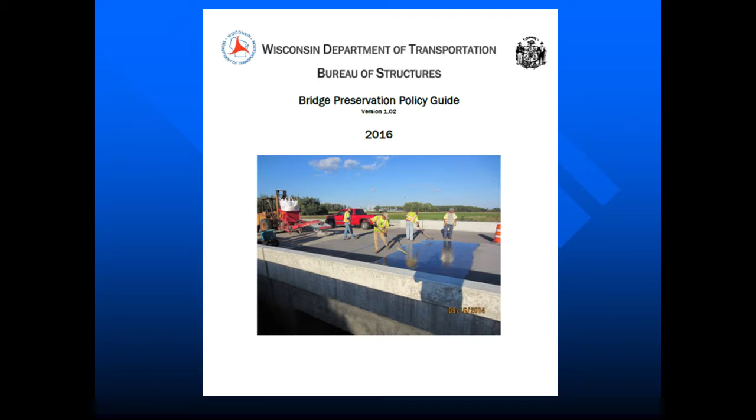But we built a preservation policy, and we consulted national sources, research related, as well as our own Wisconsin bridge maintenance engineers. And here's a few of them that participated in that. A couple of these guys, I believe Dave Bonzak and Tom Hardinger, are here at the conference. And I would really recommend talking with them, because what was important was not just a national or theoretical perspective, but actual practitioner input on this. So there's a lot of elements that you've got to weigh into this to get a policy.

The policy does have goals. We wanted 95% of our bridges in good and fair condition, 95% of the decks in good and fair, and various goals between 90 and 95% of the steel surfaces, expansion joints, bearings in condition state 2 or better. So we're mixing and matching here between NBI and element level performance goals. But as we made that transition from NBI to the element level, that's just where we found ourselves in time.

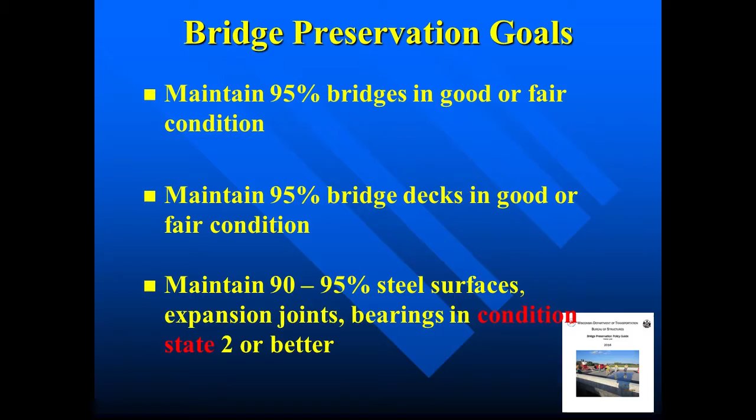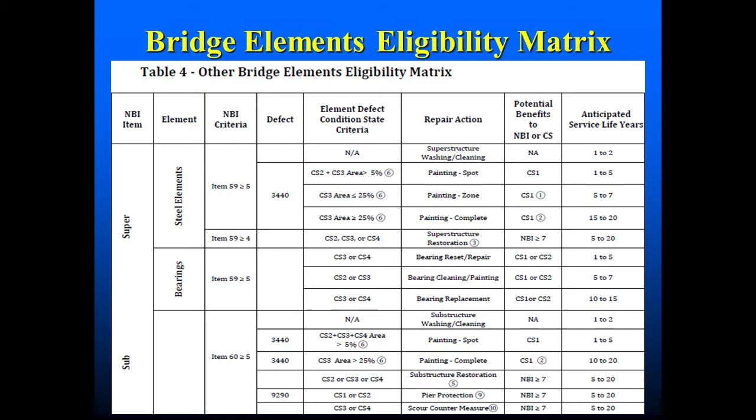Within our policy, we've got an eligibility matrix, and it has cyclical and condition-based activities in there that are indicated by both NBI and condition state, for decks, joints, railings. And we've got criteria in there. It relates to the defects. It has the repair actions in there, the potential benefit, as well as the service life extension. So these are just parts of the tables. They're actually much broader, and really look at the bridge overall in various aspects. But you can see some of those work rules here, and these are very important to what we're building towards in the future.

So part of this is not just to have a policy on what we want to do and what our goals are and what might be the criteria to trigger these works, but also to have an ability to do the work, to fund the work. And part of that stemmed from our Federal Highway Preventative Maintenance Agreement. So in May of 2016, we actually updated and signed a new agreement with Federal Highways. And what was important in our new agreement was it opened the door for some additional work types that we couldn't do historically, because we didn't have a completely functional bridge asset management system in place.

This agreement also had more work types in there, and it discussed the systematic criteria, tools, and process for implementing preventative maintenance and preservation type work. So we really got that incorporated in there. Really with these agreements that our state as well as many of yours have with Federal Highways, the real issue at hand is where's the line between routine maintenance and preventative maintenance and preservation. And the preservation end of it gives us a little bit of room for discussion. And to us, we wanted the door open as much as possible to have options to fund the work that really did maximize the life cycle benefit of the investment in those structures.

These candidates can include replacing the structure entirely, and it relies on the historic bridge inspection information. It also has deterioration, so we can look into the future. And that gets a little bit complex in that we've got NBI and element level information to consider now. So we pull data from our highway structure information system. That's the system that interacts with our inspectors, and they populate that with the regular inspections. The system will identify primary and incidental work types. So that was those charts that we showed earlier.

It will calculate the cost of those select work items, and it will calculate a condition assessment index of the bridge prior to and after the work. So you can see the benefit or the value in that investment. And it's really based off of a number of rules.

So given the inspection data, whether it is NBI-related information or element-level information, it will, on a regular basis, multiple times a year, originally I think we were thinking about doing this quarterly or every 4 months, but at least twice a year, we go through and run the routine, and it will run through and identify current needs based off of these work rules, and everything from bridge replacement down to overlays and other items in there.

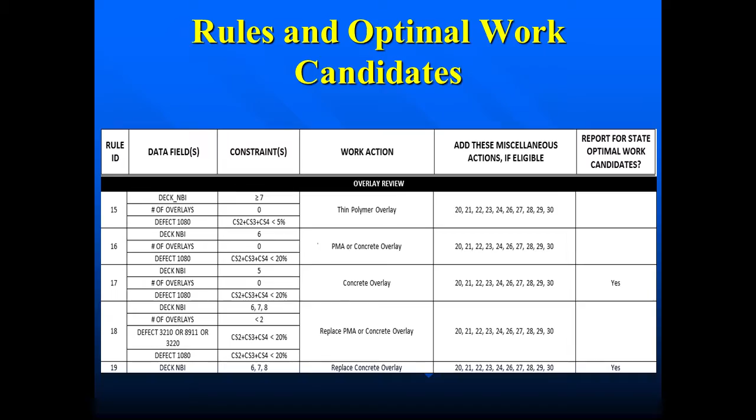So we can certainly identify current needs. The real trick is looking into the future and identifying future needs. So we do have deterioration of NBI values and element values. We also do an analysis of work types already in the program, and we do have the ability to calculate a prioritization index, or something that identifies criticality of the work. This is one part of it that we're still working on.

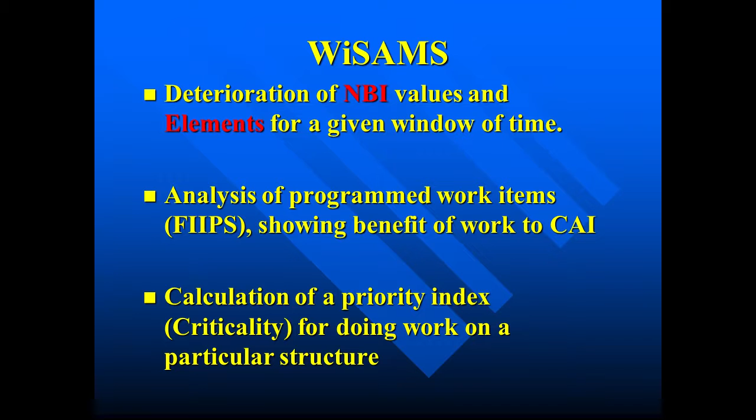We do have a routine that will do it now, but this is still up to some deliberation and adjustment, because that, again, is potentially where things become a little bit more political, is criticality of one project compared to another. But our programming people in our investment area, as well as our regional people who are actually identifying and programming these projects, it's clear as a bell that they need help with prioritization of the projects. So whether it's our current routine or future routines or whatever you're working on, that's going to be a very important element, because they need the help and they want the help as far as prioritization.

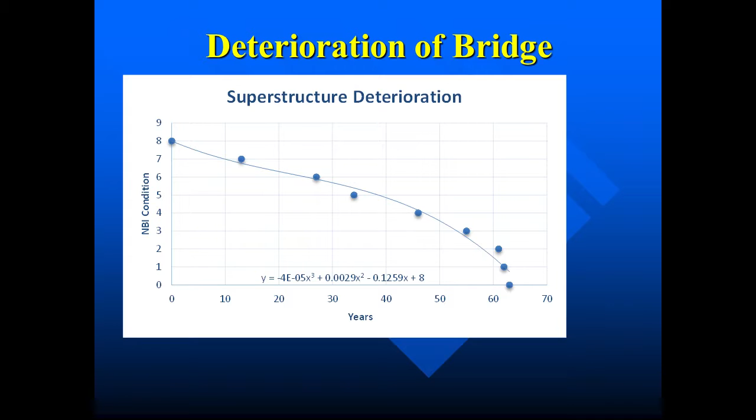So we do deterioration, and this is deterioration of some of the NBI for the superstructure, deck, and substructure. And I believe we did our own regression on these for the NBI. We've borrowed from the BrM developers some of the element level work that they've done, and we look forward to future releases of BrM and information that will help there.

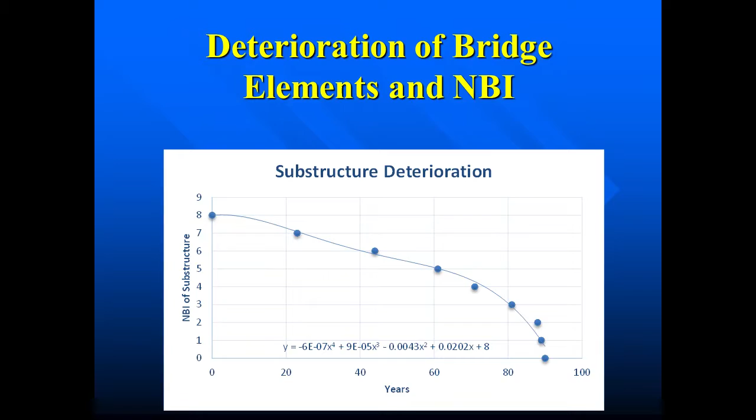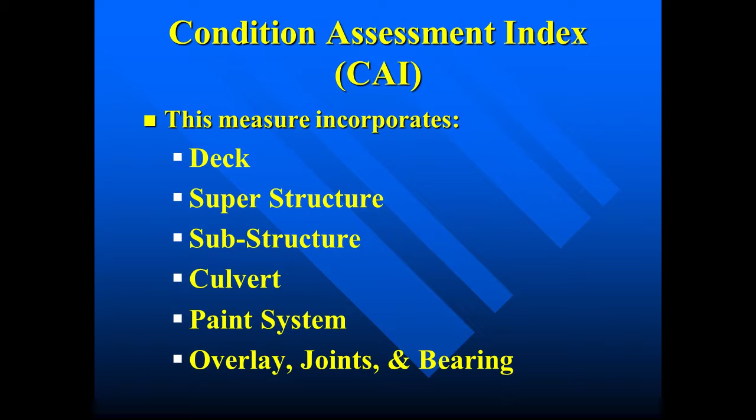Our condition assessment index incorporates the deck, superstructure, sub, culvert, paint system, overlay, joints, and bearings in there. There might be something else that I'm missing, but it's a pretty good measure of the condition. It's almost a health index of the structure.

So we supply this information, current needs and future projections. We supply that information to our investment management, our Central Bureau of Transportation and Investment Management. But we also supply information to the regions. So we'll give them more granular information.

So we're not asking our central investment people to program bearing replacements and things of that nature as part of our 6-year program. But that type of information can come down to our region people, and they can look at what the volume of some of these lesser works are and potentially combine them into economical themed projects.

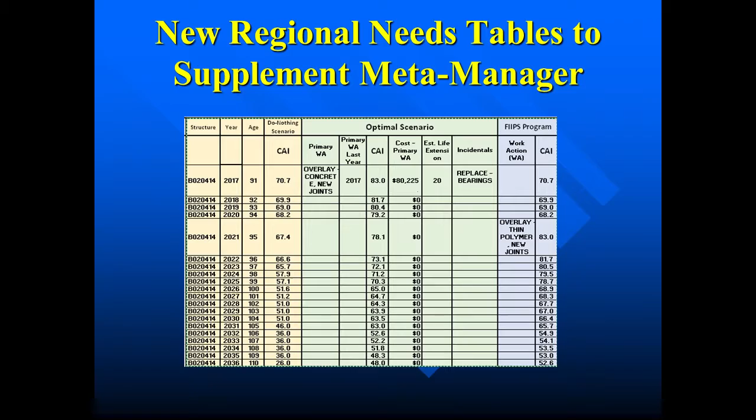So this is an earlier version of our WiSAMS table, but I chose it because I think it's a little bit clearer to see what's kind of going on here. So for a given structure, you can see the same structure going down here, and the years going down, as well as the age. And this is a particularly old structure. Our average age of our state system bridge is about 33 years, and our local are about 38 years. So this is kind of an outlier as far as age, but it'll do for demonstration.

So we have a current condition assessment index, and you can see that dropping in time as we deteriorate, whether it is NBI or element level information about that structure. Now you can also see, based off of the criteria and those rules set up, that we identified in a particular year that it triggered one of those rules. And for this one, it was an overlay and expansion joints.

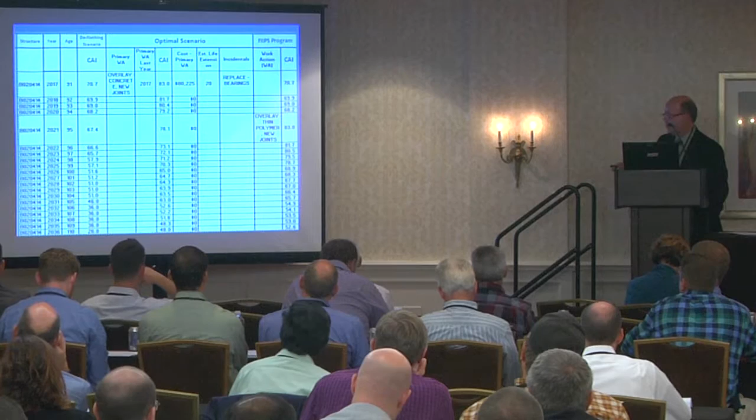So it indicates what year is the optimal or best year to do that work, and at some point that gets retired. The window's closed on that, and it's no longer a viable option. It shows the benefit to that condition assessment index. You can see it went up from 70 up to about 83. It will also give you an estimate of the cost of that work in that given year. It's at current dollars, I believe.

It'll give you the estimated life extension of doing that work to the structure, but it also is indicating the incidental or secondary items along that. Those are the items that wouldn't trigger a project, but if it's being selected as a project, very good information to know at the planning end, extremely good information to know at the scoping side. So yep, again, the optimal work, the condition assessment, benefit of the action.

What it also does is it looks into the commitments that have already been made in our financial programming system. We call it FIIPS. That's where once a project is identified and a commitment made to program it in a particular year, it will be sitting out there. And the WiSAMS will search for it, and it will note that that project does exist in a particular year. Here it's out in 2021. We thought this project should happen in 2017.

Well, WiSAMS is doing this routine based off of unconstrained needs, first of all. And secondly, when the decision makers at the regional level are programming projects, they've got a lot of other issues to consider in making a decision about programming a project, whether it is the availability of funds, whether it is other projects going on in the vicinity or parallel to this, or a whole host of other things. So we don't really expect each one of these recommendations to be adopted specifically in the year.

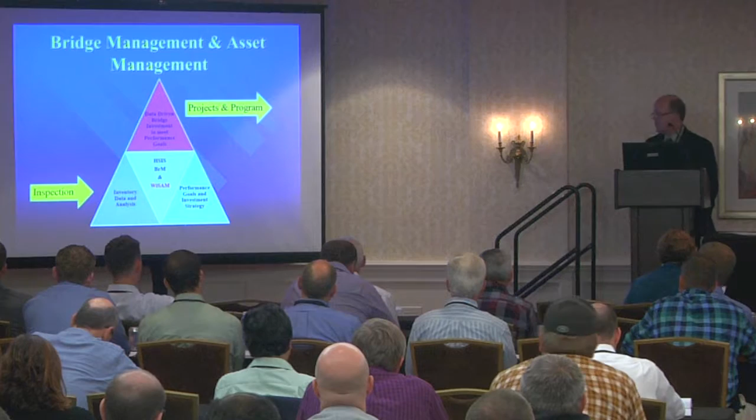So again, with the whole asset management, bridge management, the game plan is take full advantage of that great inspection information that we're getting. That's the basis of making these decisions as far as where you want to invest in existing bridges. And for us, a big part of it is to have that materialize great recommendations on programs as well as projects for our regional offices.

So we brought a good number of people from Wisconsin. I mentioned Travis McDaniel already, but also we've got some of our asset management engineers here, Philip Meinl, Ryan Bowers, and our supervisor, Josh Dietschy. So I hope you have an awful lot of questions about these, and probably some I'm not going to be able to answer. But I really encourage you to talk with these people, ask them questions about what we're doing in more detail. Perhaps we've got some of the tables and background documents with us today. But also share with them some of the things you're doing.

Because in the end, it's a cyclical process to build and improve these tools that we have, and only with those conversations will we really get there. So, with that, any questions?

I'm curious what drove the process in Wisconsin. Was it people from the bridge side pushing for, let's do this now, or was it people from the planning side saying, what are we going to do? We're trying to do this in Illinois and not gaining a lot of traction yet. It was Scott Becker.

Well, actually, Scott has given us an awful lot of encouragement and expectations along this. But as we've done it and got further into it, we, at least myself, but I believe others, saw the value right off the bat. That set of work rules to trigger work, in my opinion, is priceless. That unto itself is worth a sit-down and discussion. It will vary by region and environmental factors and other decisions in design, but to actually develop that and remove the subjectivity as far as identifying work is priceless.